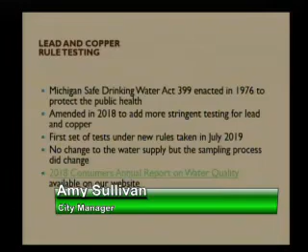It's important to note that there has been no change to our water supply, either how it's monitored or where it comes from, but the sampling process did change. And we do prepare a report every year on the quality of our water, and the latest report is available on our website.

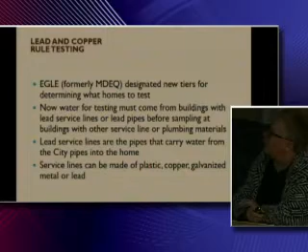EGLE, formerly the Michigan Department of Environmental Quality, has designated new tiers for determining what homes to test for lead and copper. The new water for testing must come from buildings with lead service lines or lead pipes before sampling at buildings with other service line or plumbing materials.

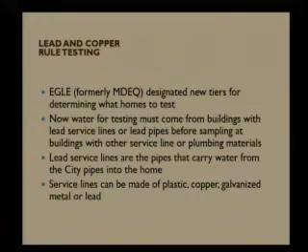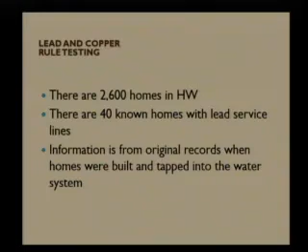Here in Huntington Woods, we have about 2,600 homes, and we have 40 homes that we believe had lead service lines. This information is from the original records when the homes were built and tapped into the water system, and those 40 homes have been contacted to advise them that we believe their service lines are made of lead.

The prior rule required 5 homes be tested every 2 years. The new rule requires 20 homes with lead service lines be tested annually. The testing protocol also changed, so that a first liter and a fifth liter of water are collected, giving us the opportunity to test the water that has been sitting in the service line, as well as the water that comes immediately out of the tap.

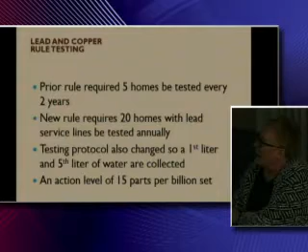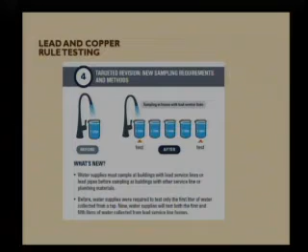Part of the new rules is an action level of 15 parts per billion was set for lead. This diagram shows that, used to be we just tested the first liter, and now we test the first liter and the fifth liter, and we test more often and more homes. So any test that exceeds 15 parts per billion for lead is considered over the action level. The action level will be dropping to 12 parts per billion in 2025.

Of the initial tests we did in July of this year, 2 of the 20 homes tested exceeded that action level. The remaining homes had levels ranging from undetectable to 5.6 parts per billion. Now the action level is not a health-based standard, but it does trigger a call to action. No homes exceeded the action level for copper, and it's also important to note that exceeding the action level for lead is not considered a violation of the Safe Drinking Water Act.

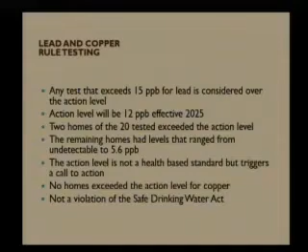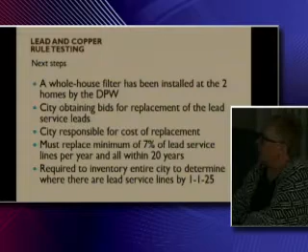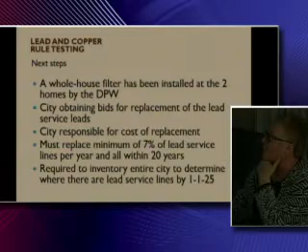For those 2 homes, a whole house filter has been installed by the Department of Public Works. When I put this PowerPoint together, we were going out for bids for replacement of those lead service lines, but we actually have identified a low bidder, and we're going to ask the City Commission to award a bid at their November 19th meeting for those lead service line replacements.

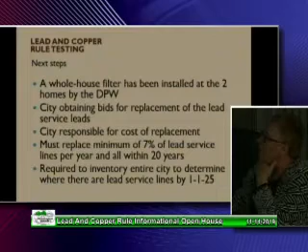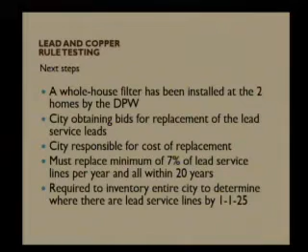The city is responsible for the cost of the replacement, and the rules require that a minimum of 7% of those lead service lines be replaced per year and all within 20 years. Staff is going to recommend to the City Commission that we do all 40 of them as soon as possible, and not take up to 20 years to do that. We're also required to inventory the entire city to determine where there are lead service lines to make sure our records are accurate, and that study needs to be complete by 2025.

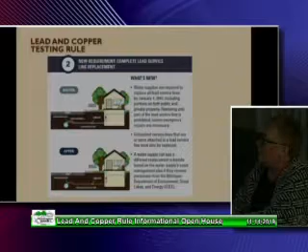This is an example of the lead service line. Occasionally, when lines were replaced, there was a partial replacement, which is just part of the line being replaced, but as part of the new rules, the entire service line from the water main into the house needs to be replaced.

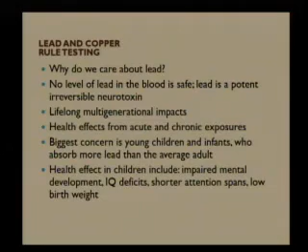So why do we care about lead? No level of lead in the blood is safe. Lead is a potent, irreversible neurotoxin, and it can have lifelong, multi-generational impacts. Health effects occur from acute and chronic exposure. The biggest concern is young children and infants who absorb lead more than the average adult, and the health effects in children include impaired mental development, IQ deficits, shorter attention spans, and low birth weight.

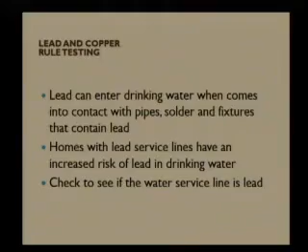Lead can enter the drinking water when it comes into contact with pipes, solder, or fixtures in your home that contain lead. So homes with lead service lines have an increased risk of lead in the drinking water, so it's important to check whether your water service line is lead. If you're one of the 40 that we believe have lead according to our records, you have been contacted.

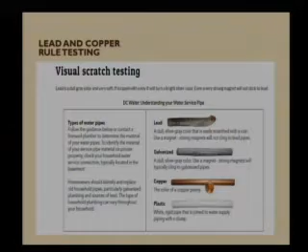A couple of things you can do to check it: you can go online, and there are instructions for tests to show you how to identify whether your pipe is lead, galvanized metal, copper, or plastic. Or you can call the city's Department of Public Works and make an appointment, and we will come out and take a look at your service line at no cost.

There are some things to do to reduce lead exposure, because even if you don't have a lead service line, you could still have lead in your solder and faucet. Some recommendations are to run your water for 5 minutes to flush water with lead service lines until it runs cold, or use a filter to reduce lead.

The Michigan Department of Health recommends any household with an infant, young child, or pregnant woman use a certified lead filter. They recommend using cold water for drinking, cooking, or preparing baby formula. Do not boil water, as boiling will not reduce the amount of lead in water, and it helps to check your faucet aerator to remove trapped debris.

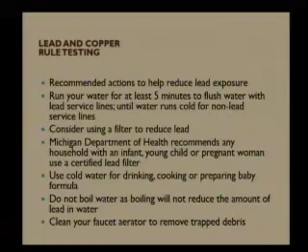We are encouraging our residents to call the Department of Public Works if you have any questions on the material of your water service line. We also are offering testing of the water for lead. There's a $23 fee, but if you call the Department of Public Works, they can make an appointment to come out, draw a test of the water, and check your service line for some peace of mind.

We also encourage people to sign up for our e-newsletter on our website, because we will send out additional information as it becomes available on this subject and other important topics for the city. If anybody has any additional questions who was unable to attend the open house tonight, please feel free to email or call me with questions.